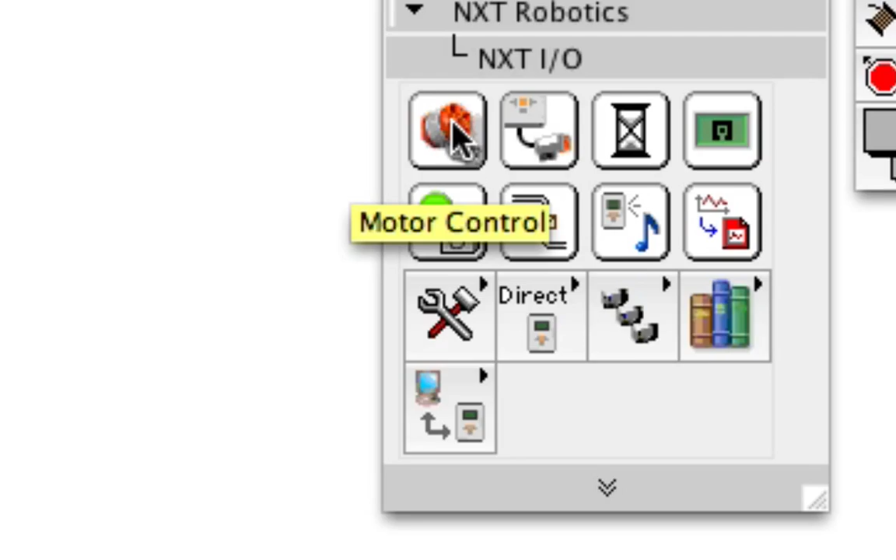So after 5 seconds, what do I want it to do? In this case, I'm going to have a motor turn on. A milk carton is going to be attached to the motor, and the motor is going to turn on, thus raising the milk carton. If you move that icon close enough to the other icon, you'll notice it automatically connects with a wire. That pink line there is a wire, so you're kind of creating an electrical circuit of sorts. So wait 5 seconds, then turn on motor A.

Let me switch to my hand tool here, and you can switch your motor on, forward or reverse, or you can turn it off, let it just coast off with its natural inertia, or you can brake it like a solid turning off. I'm just going to have it turn on forward.

And next I'm going to specify the speed. I don't want the motor to raise the milk carton full speed and then the carton starts getting all wobbly and that. So let's have it rotate at a slower speed. You right click on the lower left corner of the icon and you go to create constant, and by default it goes at 75%. I'm going to click in there and I'm going to put it at, let's say, 50. You could choose any value you want.

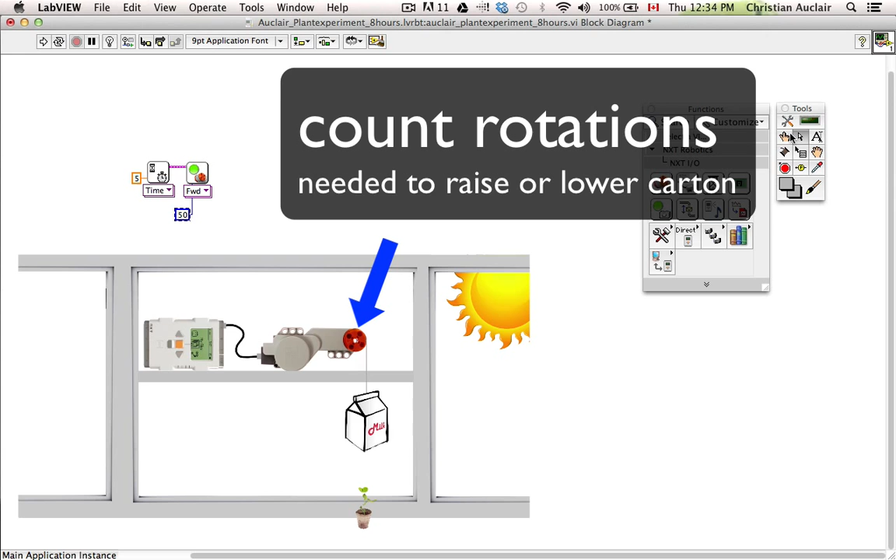I'm going to take my arrow tool over here and I'm going to grab that box and just move it out of the way down there. I know that my milk carton is now rising. The question is, how long do I let it rise? So the motor turns on, how long do I let it rise? In order to know how long I want the motor to actually stay on and raise the milk carton, I'm going to count how many rotations it takes for the motor's wheel to raise the carton fully to the top.

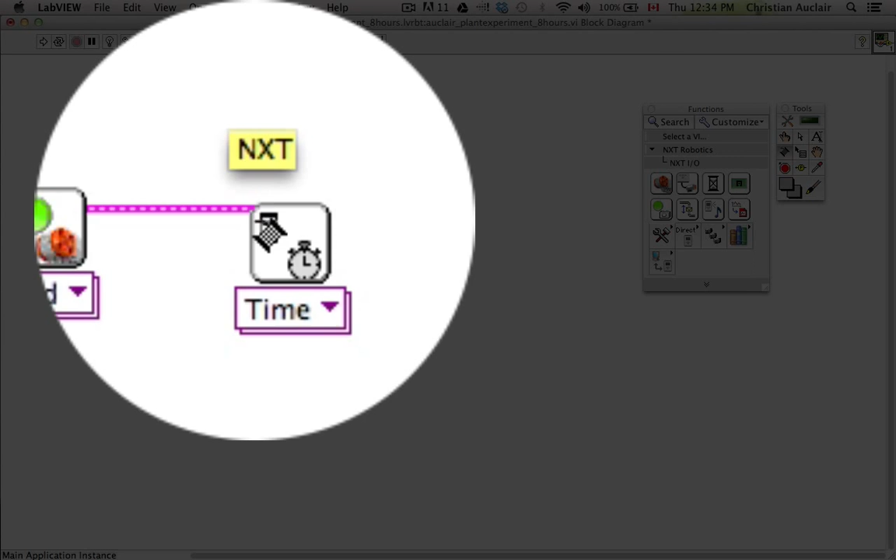Now once I've counted the rotations, I can then take this wait for command, drag it out. Now you notice it's a little too far away from the forward command, so I'm going to have to wire this manually. So I'm going to switch to my wiring tool, go to the top right of the previous icon, click, and while holding down I'm going to drag the wire over to the top left of the next icon, and now they are wired. Next I'm going to switch to my hand tool, go to the pull down menu on the wait for command, and I'm going to choose wait for rotations.

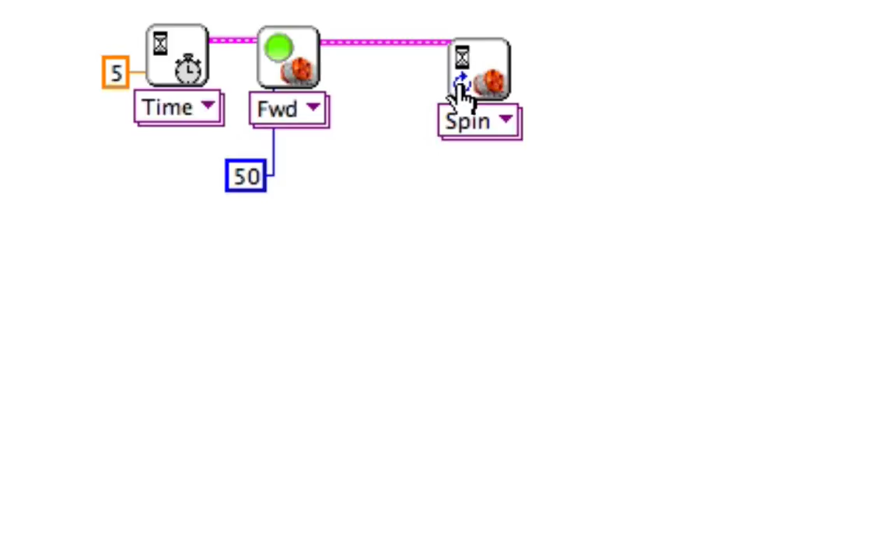Now in this case I counted 6 rotations. It took 6 rotations to raise the carton fully without it actually hitting the shelf or anything like that. You got to leave just a little bit of slack at the top. And so I'm going to add now a numeric constant, that is, specify a value. I'm going to right click on the lower left corner of this icon and go to create constant, and right now it is at 180. I'm going to set it to 6 rotations. Now here's where you have to do a little math. Well, one rotation is 360 degrees. If you want to do 6 rotations, you're going to have to go 6 times 360 degrees.

So this is where we're going to go to our spreadsheet. I'm going to jump to Excel, and I've posted a copy of this spreadsheet on the website so you can download it and use it. However, in the second video that goes with this experimental process, I put together a video that shows you how to enter the formulas and to use Excel. Now, Excel is a calculator. Any cell that you click in is actually a calculator. And if you turn on your formula bar, see this f of x bar here, opens up a bar over here, you can type in a formula.

I'm going to go equals. Now to start any formula you need to start with an equals, and I'm going to say 360 degrees times, now that's the little star that's above the number 8, so you hold shift and push number 8, 6, and then you hit return and you get your answer. It's 2,160. So I'm going to flip back to LabVIEW and I'm going to go in here and change this number to 2,160. That is 6 rotations, and hit enter.

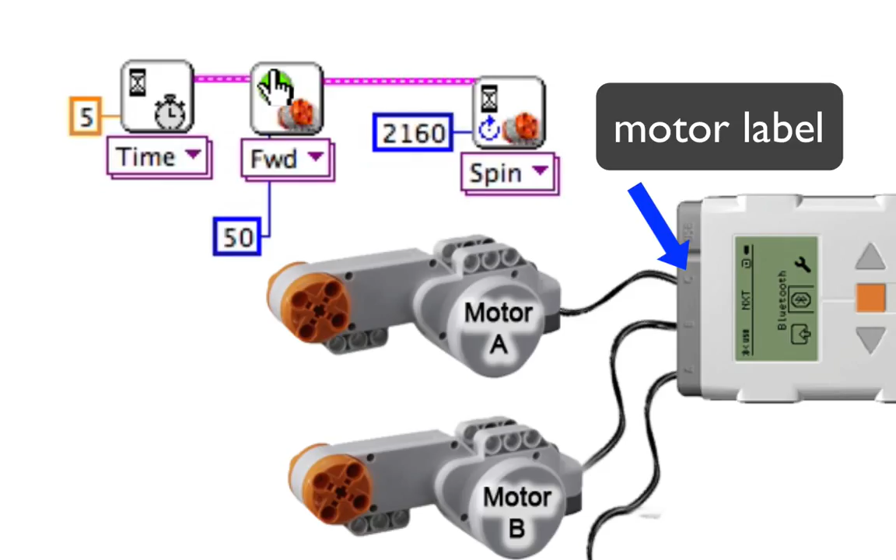Okay, one little thing I didn't do so far is I didn't specify which motor I'm talking about. Now, on the physical robot itself, you have 3 output ports, or on the EV3, you have 4 now. You have A, B, C, and D. On the NXTs, you have 3. And in this case, I've connected my motor with a wire to port A. So it's motor A, because by default, right now, it's just going to do all motors. So to specify the motor, take your hand tool here, and with that little index finger, click on the top center of the programming brick, right click, go to create constant, and then you've got all ports here, click on it and choose port A.

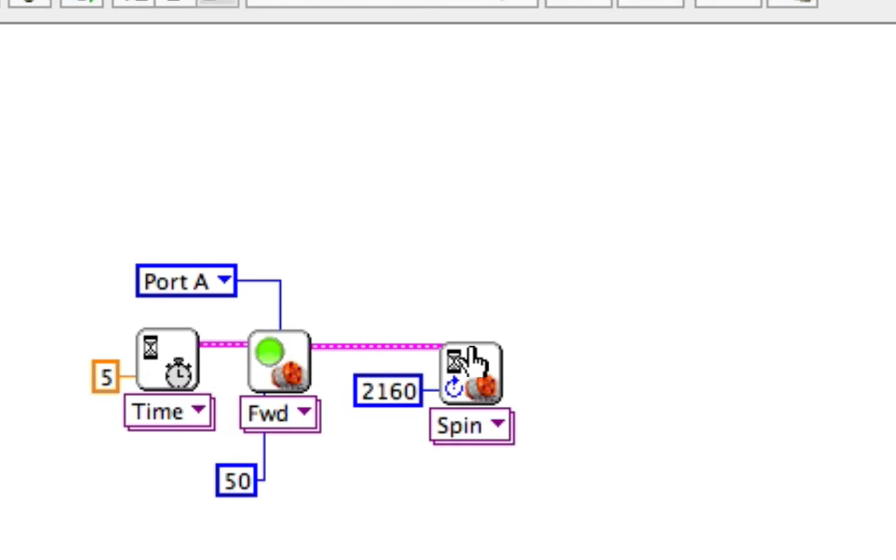And do the same thing for this wait for command, which is now spin. Now if you accidentally click a little left of the center or something like that, and you go create constant, you might get like a pink box like this, and that's not going to be very useful for you. So take your arrow tool, click on that box and delete it, and try to get right in the center, right click, create constant, and specify port A.

Another way that you could have done this, let me edit undo here, is you could just take your wiring tool, click on the wire from the previous port A, and because the second icon is also going to be port A, just click on this wire, drag your spool of wire here, click to anchor it, and then turn down and click on the center, and there, you're now sharing this command of port A with this icon and this icon.

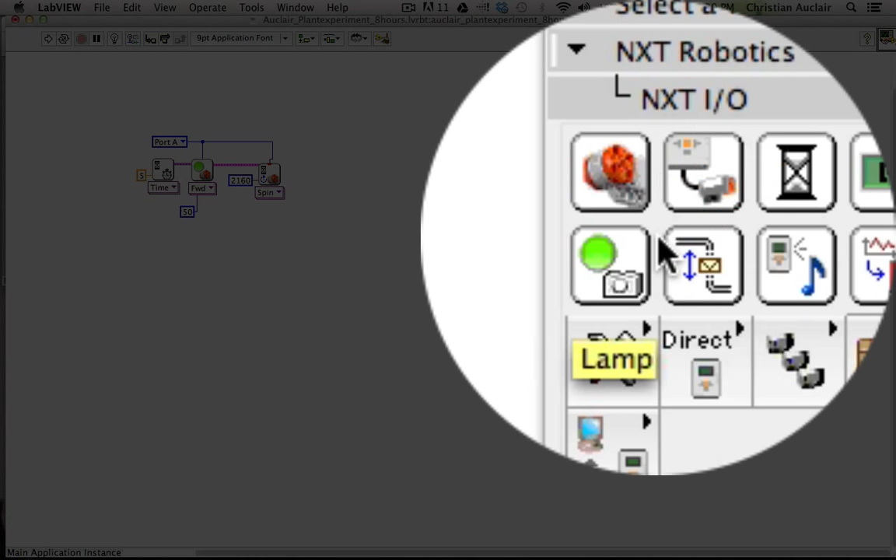Okay, so once it has spun 2,160 degrees, which is 6 rotations, I want it to stop. So let's grab this motor command, bring it close enough so it wires automatically, and then with the hand tool, choose motor off brake, so it stops instantly. And again, I can take my wire tool and specify that it is motor A that is to brake.

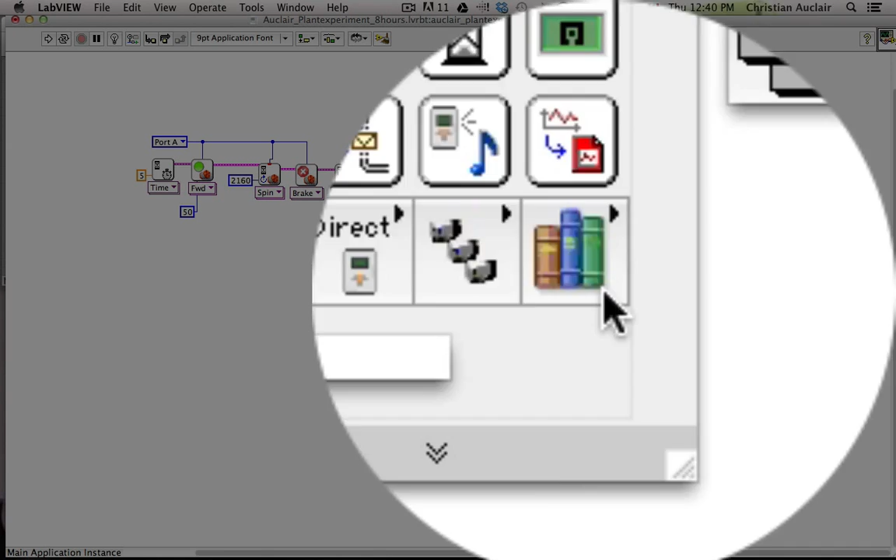Now let's assume that the milk carton has now risen and it should get about, I said 8 hours, so let's pretend those 8 hours are 8 seconds. So I'm going to give it 8 seconds of sunlight. So let me wire this and get my hand tool, right click on the lower left corner, create constant, and I'll give it 8 seconds.

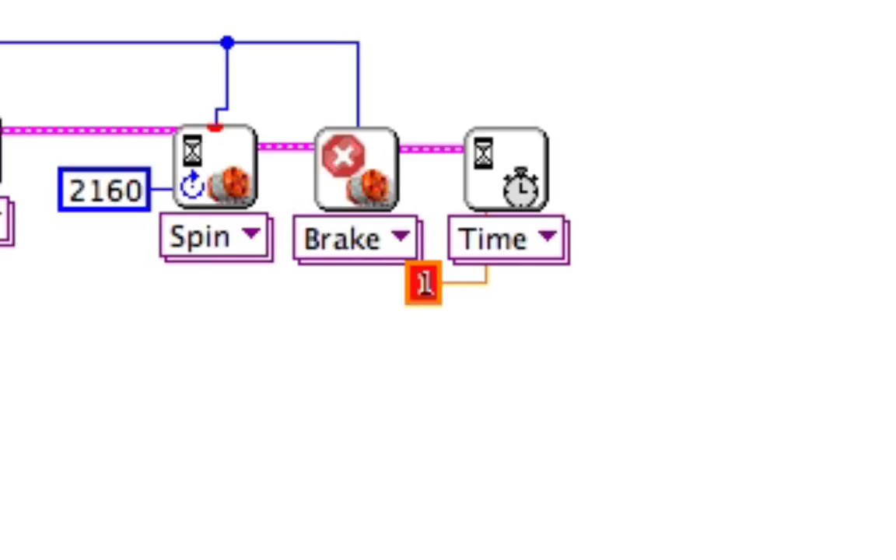So the milk carton is risen, all motors are off, the plant is being exposed, the program does not move forward for 8 seconds, which means the plant is going to be exposed to sunlight for 8 seconds. Well, once the plant has now had its sunlight, we're then going to want to lower the milk carton, and we're basically going to be doing everything we did here but in reverse. So you know what, I'm going to show you a little trick here.

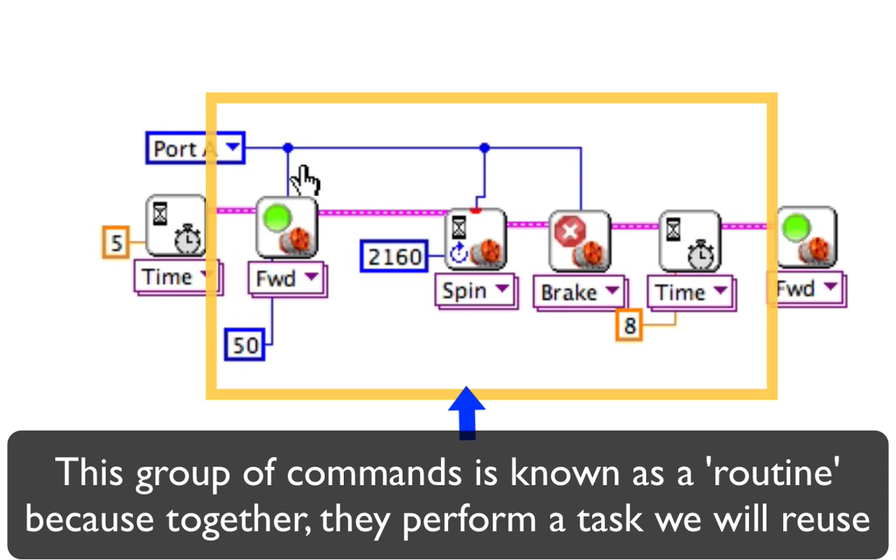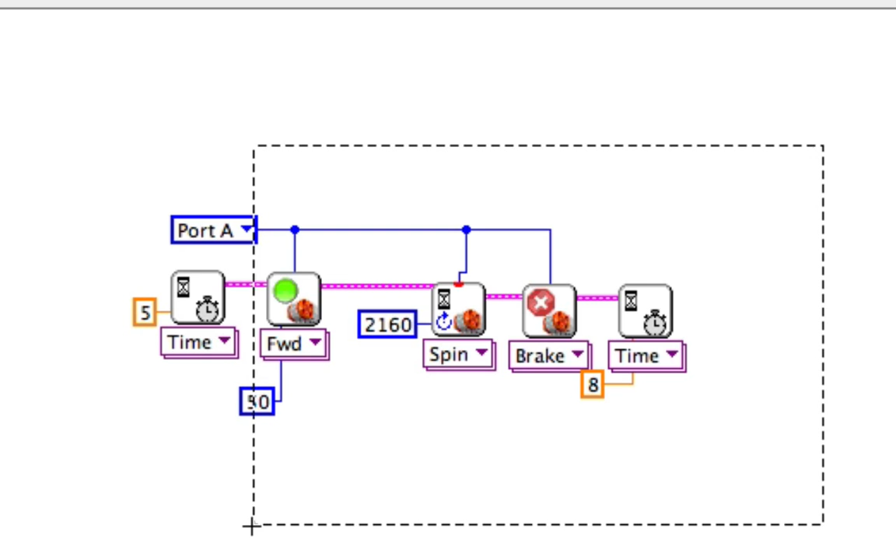Because this is what we would call a routine, this whole group of icons. Let me delete this, and you'll notice there's a little wire left over. That's called a bad wire. You can click on it and hit delete. What I'm going to do is I'm going to take my pointer tool and I am going to draw a square around these icons. I'm going to then go to the edit menu, copy, and I'm then going to paste. And I basically have a duplicate, but let me click anywhere to deselect that.

But in this case, we are reversing everything. That's the only difference. So I'm going to go to my hand tool, switch the forward to reverse. So now the milk carton is going to start going back down. How long should it continue to lower itself? How long should the motor stay on while it's lowering? Well, we said 6 rotations. In this case, it's going to be minus 2,160. We're going the other way, minus 6 rotations.

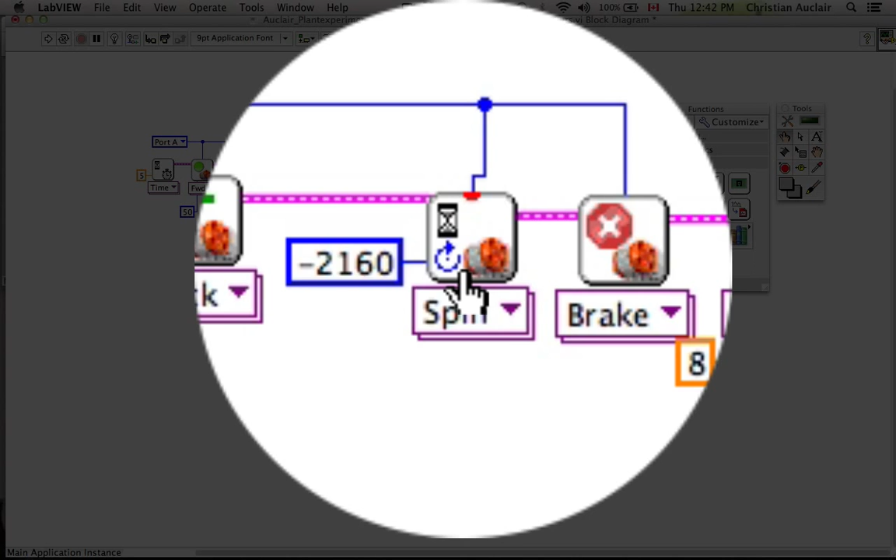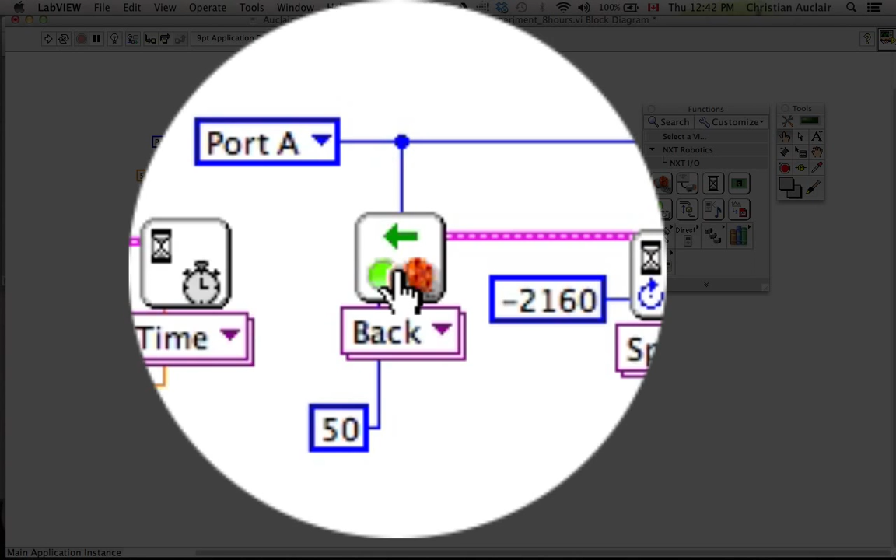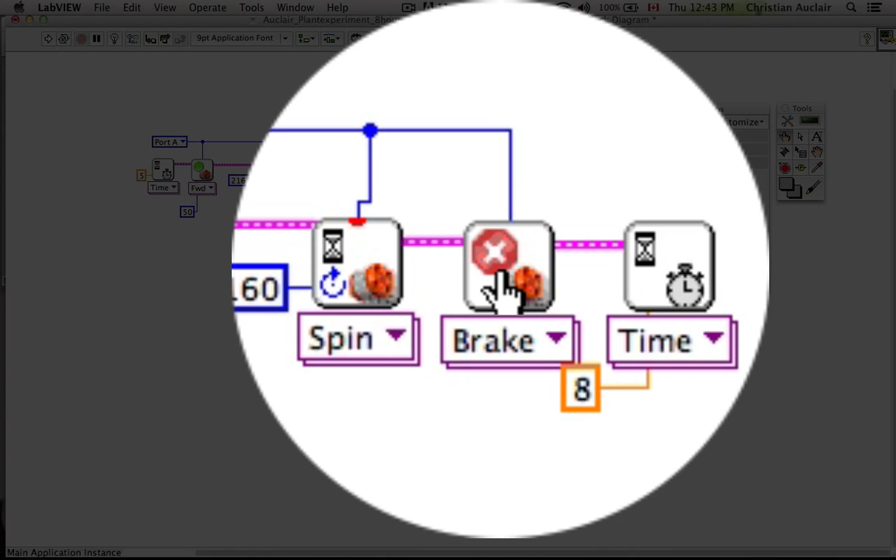If you left that as a positive number, this motor would continue to lower forever and ever, infinitely, because it would be waiting for 6 rotations forward. So we're specifying 6 rotations backwards now because we're actually in reverse. It then counts. Once it gets to negative 6 rotations, it knows that the carton is back down and lowered and covering the plant. We brake port A, and how long should we wait before we start over?

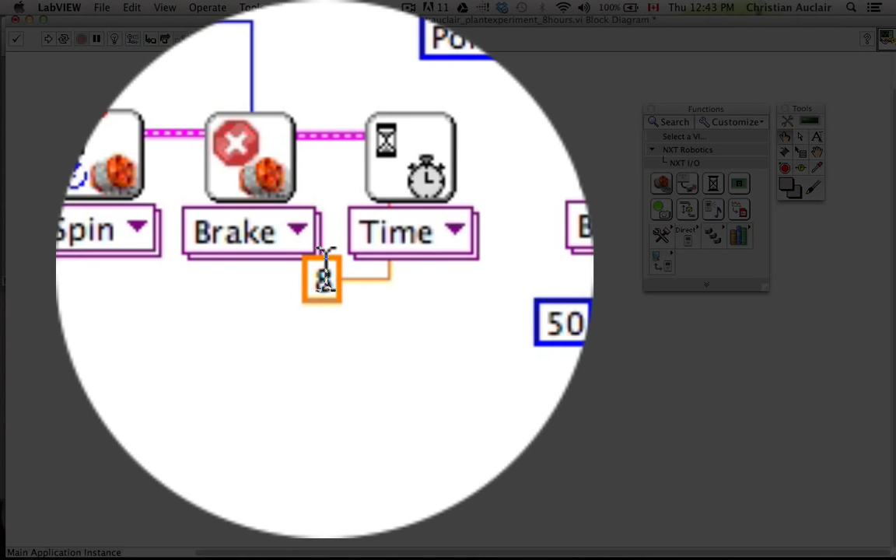Well, again, remember I'm saying let's pretend that the seconds are hours. So far we've used 5 seconds to wait and 8 seconds for the plant to be exposed. That's 13 seconds so far. So in terms of a day, we'd have another 11 seconds left. So we'll make it wait for 11 seconds before it proceeds to continue the program. But there is nothing else left over with this program. In other words, it's just going to run once. And then when it gets to the end here, there's nothing.

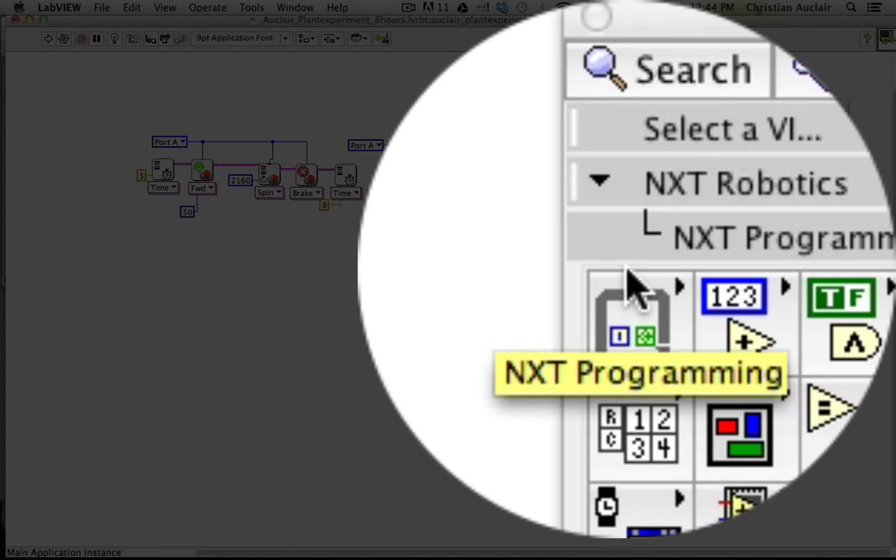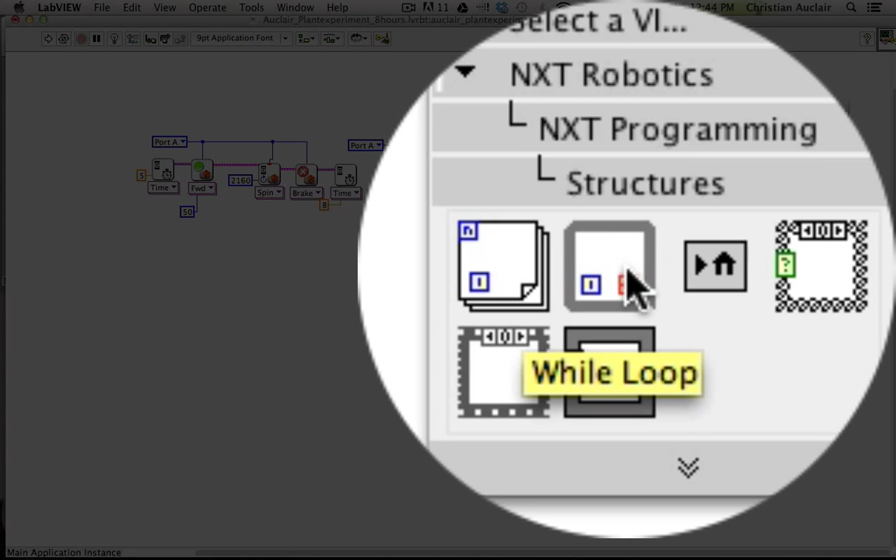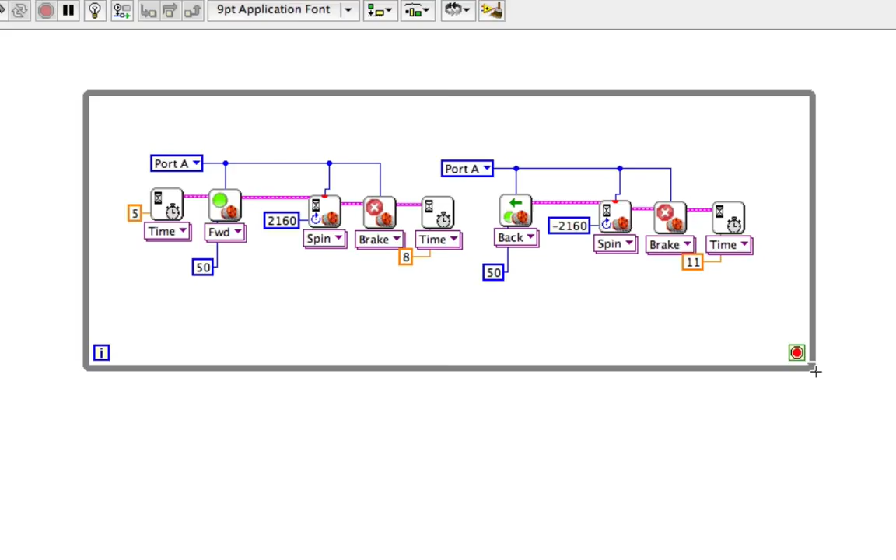So in the last part of our programming, we're going to add an actual structure here called a loop. So the loop, if we go back to the first menu of programming families here, and we go to the first set, which is NXT programming, and we go to structures, we could then choose the while loop. Click on it and come over here and draw a square around your program. Your program is now going to loop infinitely.

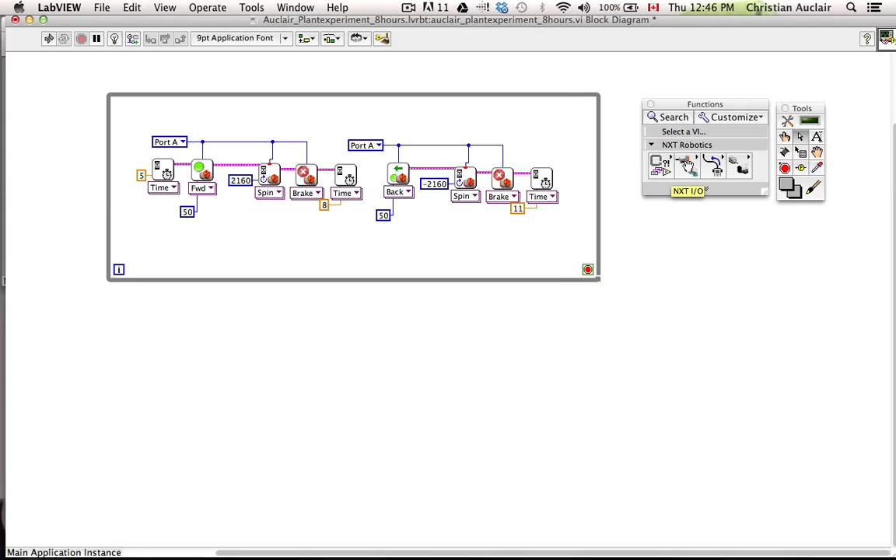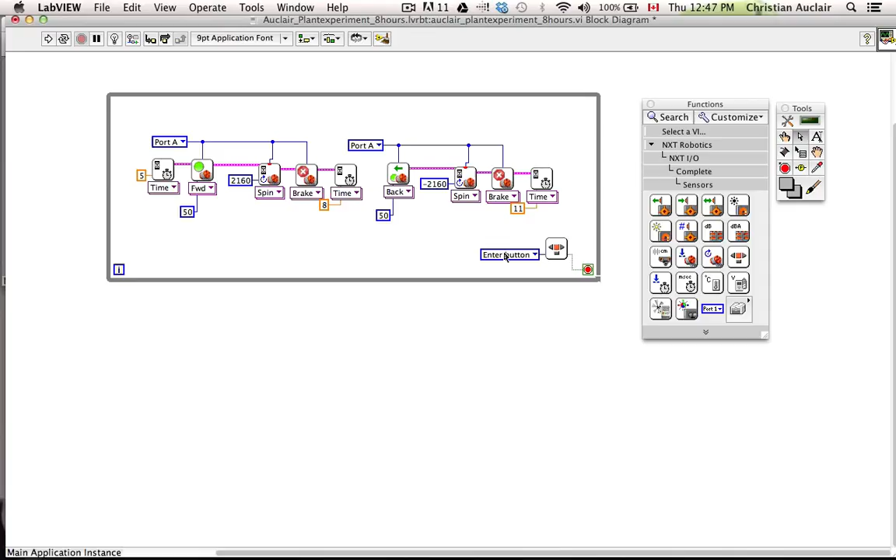Now if you want to specify when the program can be stopped, you will do the following. We will go back to our NXT I/O family. We'll go to this library of complete icons, go under the Sensors submenu, and I'm going to drag this Read NXT buttons. That is the physical buttons on the NXT itself. And now that is wired to the stop button. And then I'm going to click on the lower right of this, create numeric constant, and it's the enter button. So this program will run continuously until somebody physically hits the enter button, which will stop the loop and stop the programming.

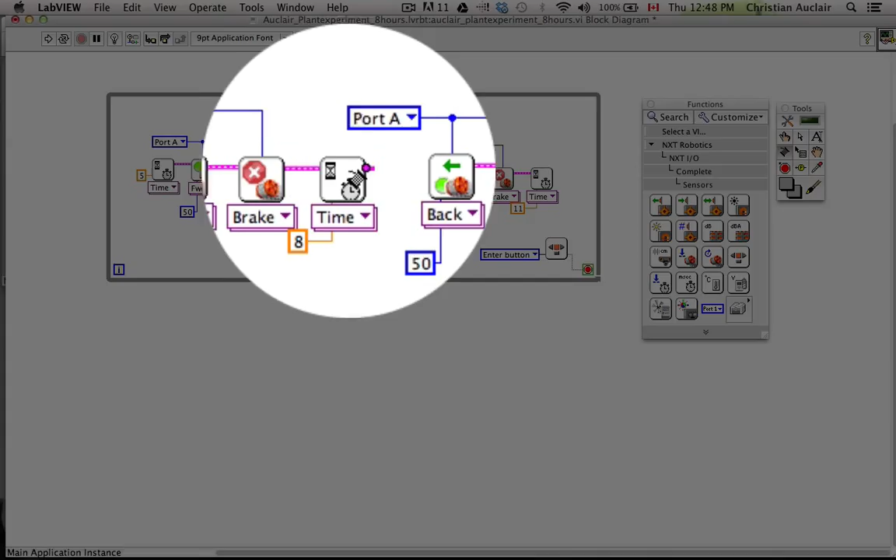Now we have one little detail that we missed in here, and programming is all about details, and our actual loop would not run here. There's actually a mistake in here and I didn't notice it, and that is we did not wire these two sections together. So I got to go back, click on this, and then wire it. And now the program should run just fine, and we can run it on our NXT.